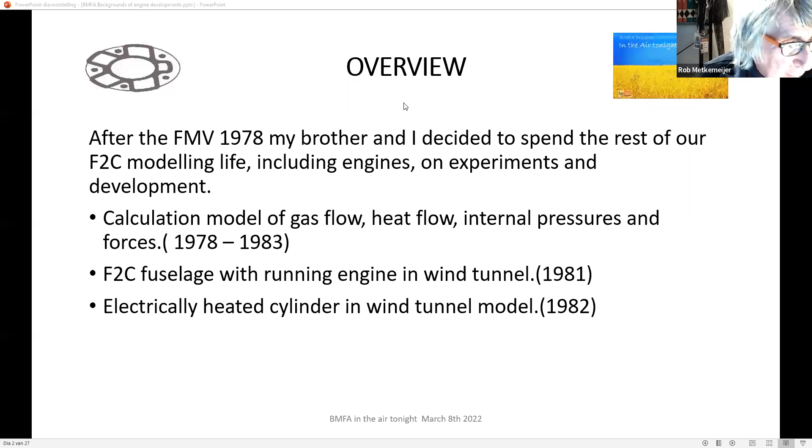The start was after the engine of 78, which was a steel engine with a hard chrome cylinder and a kind of special piston. I will not say too much about it because it's all been published in that Aero Modeler article.

After the World Championship, I remember I sat in a train somewhere 2 months after, and I thought we have to go to aluminium. There was a good reason for that, because not many people know, but about an hour after we won the World Championship final in Woodvale, Mauke Schwentner, who was second in that final, tested a new Nelson engine, which was an ABC. I am about 100% sure that if they had used that engine in the final, they would have won it, because it was much better than the steel one they used.

So I was convinced we had to go to ABC. People who read the FMV article in Aero Modeler will see we were already thinking about material combinations you could use for aluminium cylinders and pistons so that it could work. And funny enough, those ideas seem to be quite right. So, in that train...

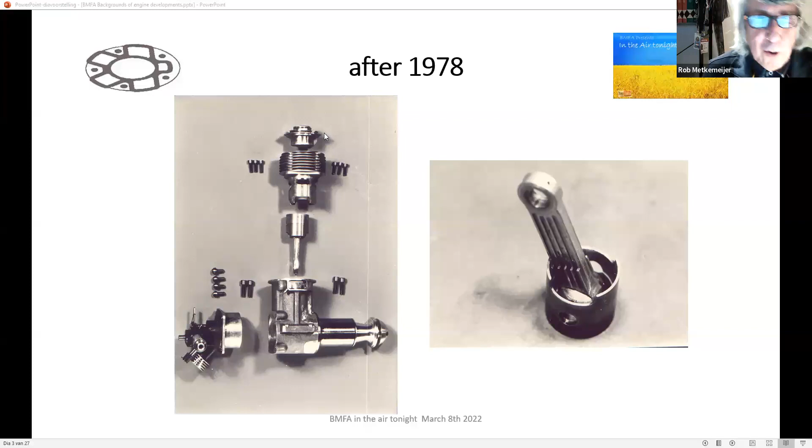Okay, I go on with the next one. I will try. I'm not going to explain you the full model, but I just want to show you how simple it actually is.

And then you have the cylinder where something extra happens. You get heat generation there. When the piston is going up, you get heat generation. And of course, then you have the exhaust.

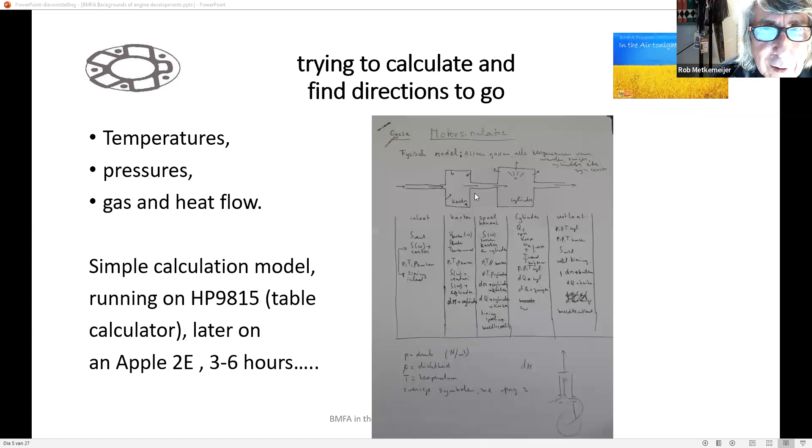That's very important. So what does such a model do? It simply changes by 1 or 2 degrees the position of the piston in the system. So you get all kinds of volume changes, and you get all kinds of gas flow.

In itself, these are quite complicated things, because all gas flow is kind of supercritical, or however you call it. It's kind of a shockwave transport of gas. It's not simply Bernoulli's law - it's different from that. It's kind of adiabatic expansion all the time, because the ratios of pressures are so high.

So these are the parameters which are important. And what you get with such a model is you just start it. You put in the initial pressures and temperatures and everything, and you let it run. You let it run a couple of revolutions, and hopefully it stabilizes. So it's stable when, at the end of the cycle, all the parameters are the same - the pressures and temperature are the same as at the beginning of the cycle.

So after a number of revolutions, you get a kind of steady state situation. I took as a criterion that it would be steady state if the air mass that goes through the venturi is equal to the air mass going through the transfer ports, which is equal to the air mass through the exhaust ports. And the funny thing was, it was kind of amazing because I don't really understand why, but it always gave...

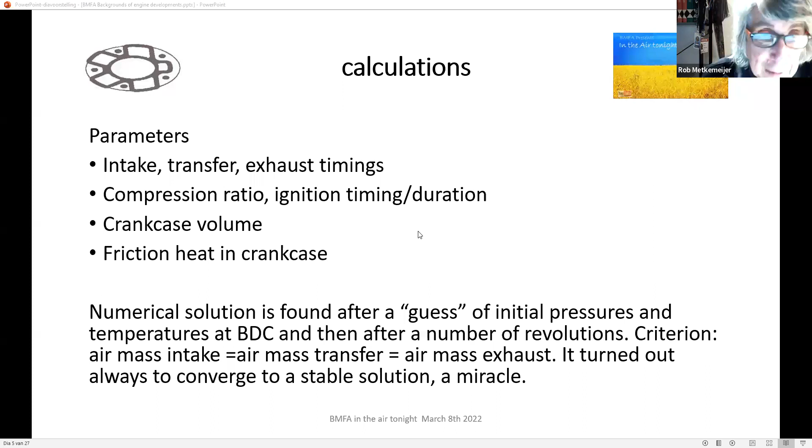Convergation, or converged - is that English? Maybe. It finds a solution. Do you mean confirmation? No, it means it comes to a stable solution. Convergence. Okay, convergence. Yeah, converge. Yeah, that's the right word then. It always converged, and I have quite some experience with trying to numerically find solutions for problems, and they don't always converge like that. But this was - it always converged, so I trusted that it gave about right results.

I'll give a few examples of results of this kind of calculation. At that time, we were really interested to see what kind of difference we needed between transfer timing and exhaust timing. Everyone can understand that when the exhaust opens, you need a certain amount of time to empty the cylinder so the pressure is low enough that the crankcase pressure can start filling the cylinder.

This is more tricky than you would think. I'll come to that later, but the original idea was that it makes sense that the pressure in the cylinder is at least equal to or lower than the pressure in the crankcase when you open your transfer ports. That means that the direction of the gas is into the cylinder and not back into the crankcase.

In human sports, it's the same. A good sportsman has a high oxygen consumption or use. So, that's recalculated to timing, to time for 10 laps in a team racing, because that's what everyone understands.

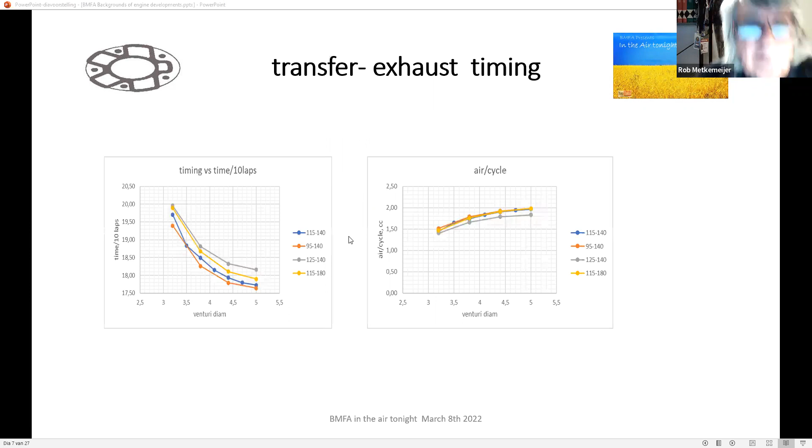The silencer, I come back later, maybe. One of the other, I go on, Barry, if you don't mind. I go in the story.

Yep, pick back up. I hope the people had the questions in front of them, because I did not repeat the questions, maybe I should have done that. Anyway. No, that's okay. Yeah, it's much easier to be in a small room and see the asking questions of everyone, I mean, the eyes open.

One of the things that came from this model was how the energy coming from the fuel and air is distributed over the engine and where it's going. You can calculate from the fuel: we have 7cc of some mixture with kerosene and ether. That should be 2250 joules, watts, for the kind of consumption we have, which is about a bit less than 3 horsepower of heat going into the engine.

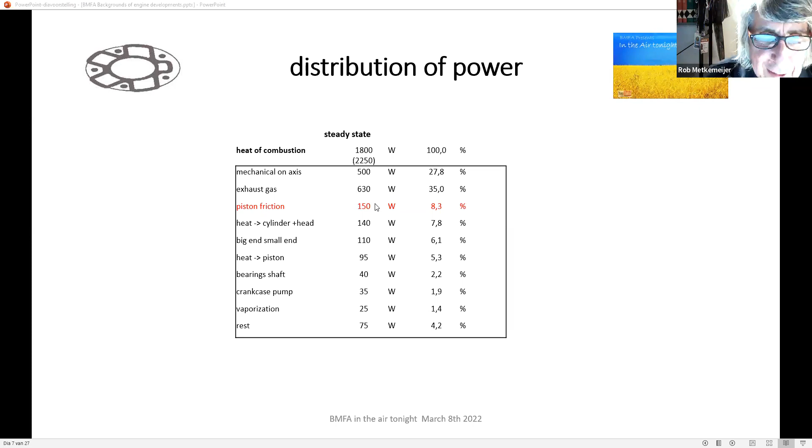I just saw questions about this. This is going to the load on all the bearings - mainly the big end and small end bearing and the bearings of the shaft.

What you see here is a calculation model that we use later when we're working on the pylon engine. It's coming from Frits Overmars, who is one of our Dutch guys who worked a lot in two-stroke motor racing. He was part of Aprilia.

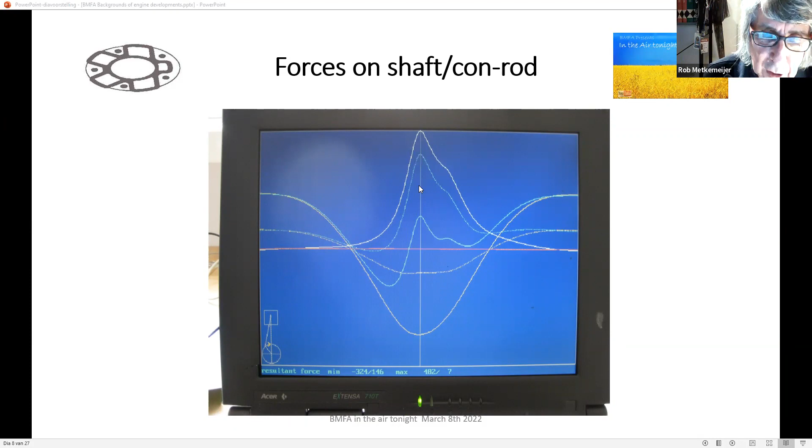and get the pressure on the whole bearing system down, which is maybe not according to your intuition. If you made a heavier piston and conrod, you'd have less force on the shaft and conrod, but more external vibration, which you don't want. Then you get foam in your tank and other problems. We don't want too much vibration in the models.

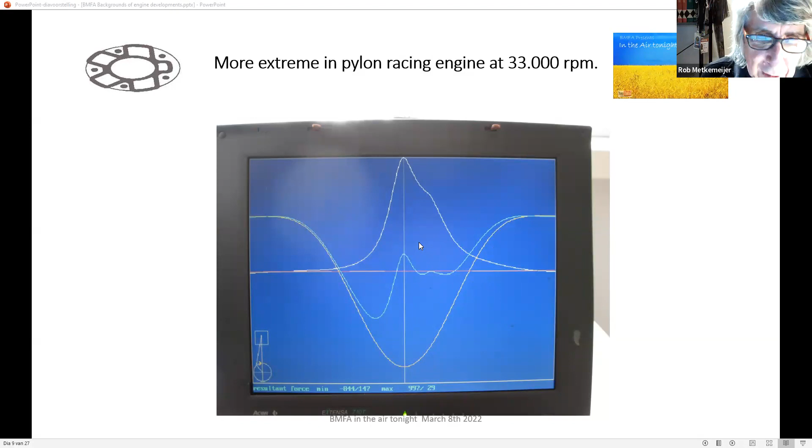Shall I go through some questions? Yes, Rob. I think if you could start from Neil Lickford's question at 7:35, he asked about team race pistons, ports, etc. Maybe this time read the questions out loud, it may make referencing a bit easier. Paul had a question about the promising modification.

Yeah, I'll come to that one. The silencer, I'll do something on at the end. I see the time is running, so... What about Andy Ellison's one? We'll come to that at the end.

What about Richard Palmer? Did you make the pistons tapered and oval like a race piston? Yes, we always do—it's already in the FMV article from '78. We made them tapered, but we don't make them oval. Maybe we should, but I'm only an amateur, and I don't have a machine that can make oval pistons. In team race, I'm not so sure, because you want the engine running when the cylinder is round—that's a bit of a problem. If you have an oval piston and the cylinder gets round on the ground, it may not start. So we never did this.

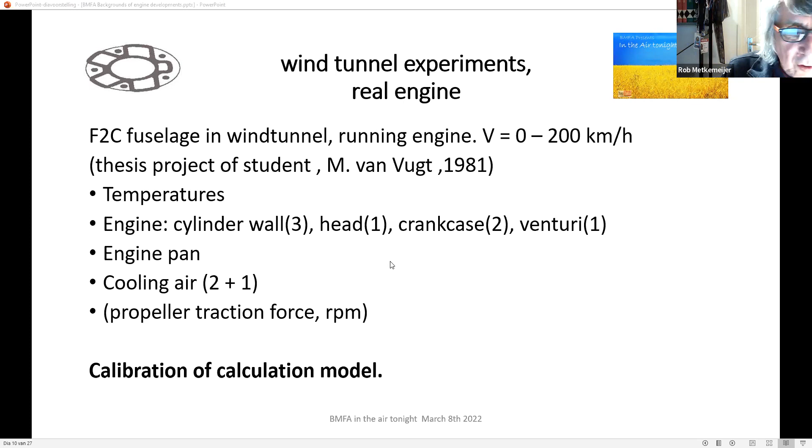But after about 30 seconds of running the engine, you see nothing anymore because the air goes round in a circle. So we had to do something special and let the air out of the wind tunnel, because the oxygen would run out very soon. That's not so easy, and of course it's not easy to start the engine, heat it up, and then do a run with the wind tunnel. It was hard work—I think we did 5 evenings of 3 or 4 hours to get 20 proper runs with a properly running engine.

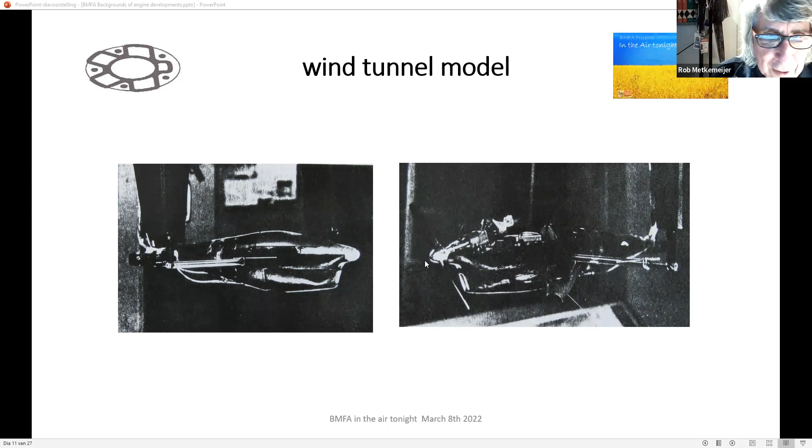This is about what is inside the model—more or less where the thermocouples are and what we did. You can see here that we had the possibility to put hot air into the engine or block it off, to have more or less the normal setup with warm air in the engine.

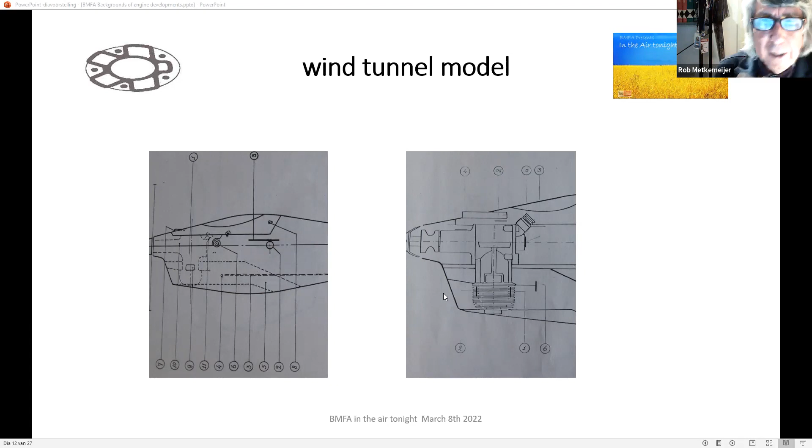And then the second year after, we had a similar student, Erik Janssen. Many of you know him. He was a F2B pilot, quite good, and he did his thesis on electric - on the same experiment, but then with an electric motor on the prop and electrically heated cylinder head.

So we could more accurately see what was really happening with the heat transfer in the cooling system of the engine. He studied a lot on how you should make cooling fins for optimum cooling power, and what was the relationship - how effective our way of cooling was in the model.

What was very important and very interesting for us was how oval our cylinders get when we run them in the model, because the air comes on the front of the engine. It goes very well through the sides of the engine, but it doesn't really hit the rear. So what temperature differences would you get?

When I tried to make pistons, I tried to get within 2 microns or so in roundness. And the whole unroundness of the system under normal cooling conditions is something like maybe 50 times that. So you get a very oval cylinder when running. As I said before, that was the reason we had a special piston which would adapt to that.

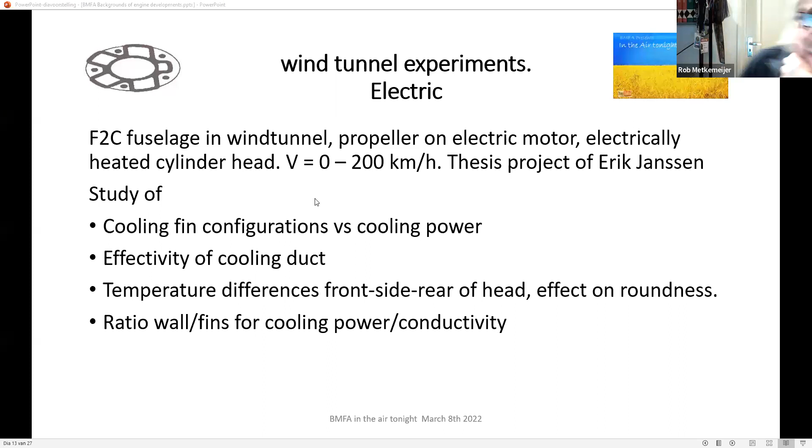Well, it would go too far to go through both reports - that's maybe 2 days - so I'll just go to the conclusions we took from it.

We found from running in the wind tunnel with the real engine that there was always a temperature increase during the run when we had a normal setting, something like a 35 lap setting on the prop we used. The engine behaved pretty normally, and we had something like the right airspeed in the wind tunnel, so I think what we were doing was quite right. Our conclusion was that it would be better to make more power and have 25 lappers instead of 35, which was normally done, and we did, to keep the cylinder temperature in a closer limit.

We measured the cylinder wall temperature in those tests. The cylinder wall temperature, where the engine was in a kind of normal running situation, was between 160 degrees centigrade and 230. Between those temperatures, there was no difference in how the engine ran - same RPM, same consumption, everything, between 160 and 230 degrees centigrade.

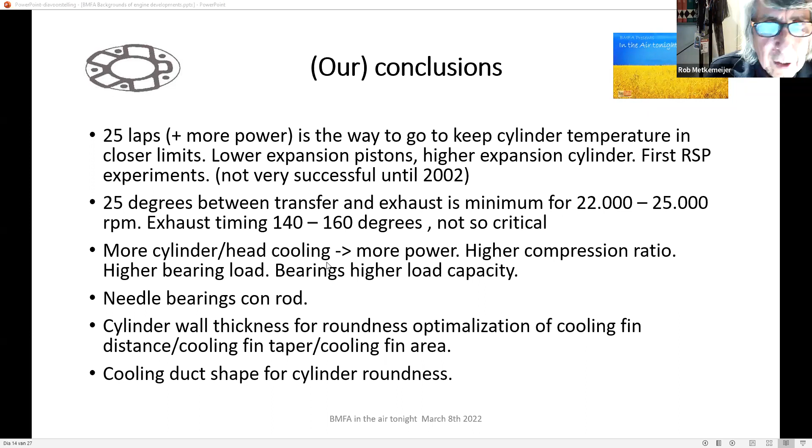This is very specific to a team race engine with integral cylinders. For something like a speed engine, it firstly has relatively a lot more internal cooling from the fuel - a lot more fuel - and usually a cylinder that hangs more or less loose in the crankcase, maybe not on top. So there the cylinder gets round easier, but the more air you put on a head, the more unroundness you get anyway. So for this team race setup, we tried, but we never really worked hard, to be honest, on this cooling duct shape. I don't know why now.

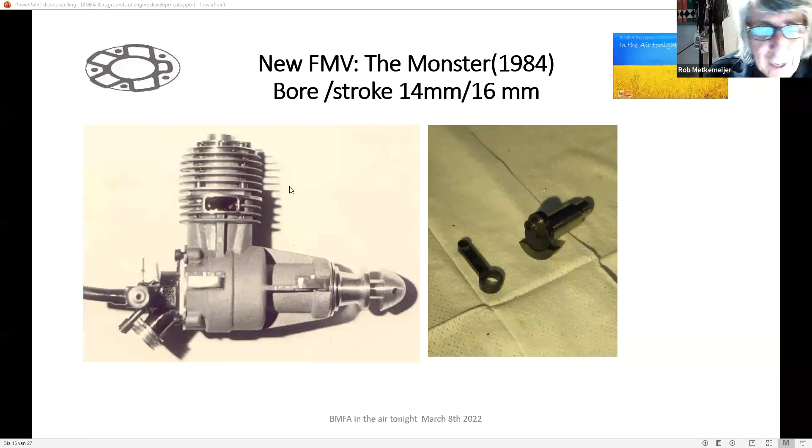As I just said, the cylinder and head were more or less following our findings from the work before. We also made the small version of the old FMV with the needle bearings and the steel conrod and another type of balance weight.

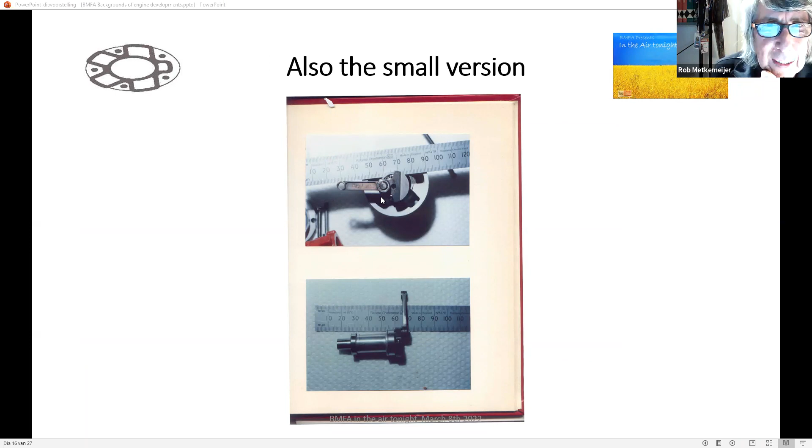And then after a few years of trying, we found that this big engine, which was strong enough, was extremely stable. You could set the compression anywhere and it would run, but it was too slow. So that's what happens. We also found, in experiments with this engine and others, that when we put more distance between transfer and exhaust, we were reducing burning efficiency, and we needed much higher compression and it would never run. More cooling is very hard on the engine, even on the very strong bottom end, even if we got power now and then.

And then the needle bearings - we really did the one-to-one comparison and never really found much better. Yeah, you want to see it's better because you worked hours and hours to make it. But to be honest, after a few years, you say, well, come on, forget it.

In the end, we got a higher exhaust - not extremely high, but higher - and a high expansion cylinder. So when you have a higher expanding cylinder, your piston may get hotter before it touches the cylinder wall. That worked. It was not so easy to start, but well, we were at least at the Euro Championships in '87 - we had one going really, really well.

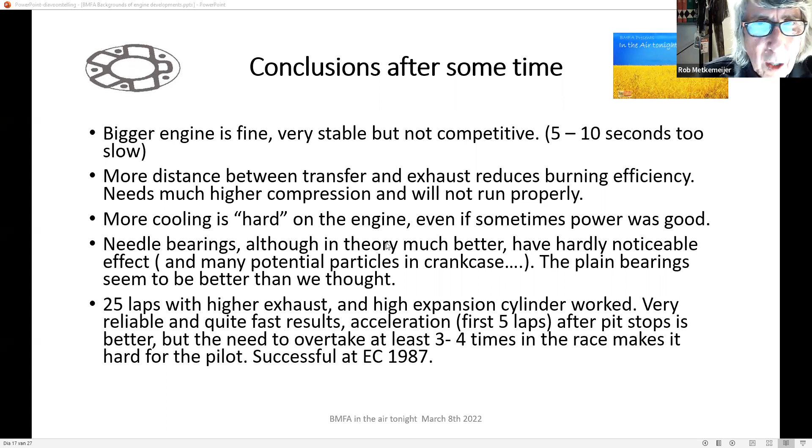Well, you see here a few cases we made on several setups with steel front ends. I still like steel front ends, to have bearings sitting in steel instead of expanding aluminium.

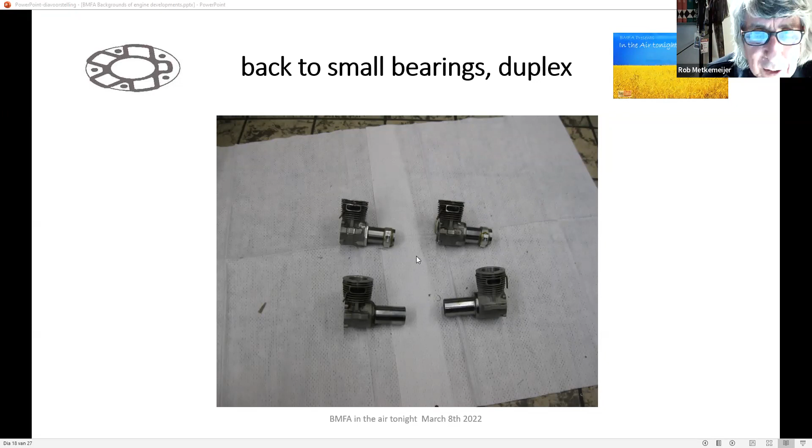These are a few examples of engines we made in, I think, 1990 or 1991. This one is a bit later. It's called MB in the meantime, not FMV anymore. It was working together with Peter Brendel, the Metkemeijer Brendel engine. The right one has the steel duplex, or the three bearings - two here, one here - with all bushes in between to set the place and position.

But this is a steel bush that goes straight into the crankcase, so the bearings sit in a steel bush. This was quite a successful engine. Bert and I had very good results between 92, I think, and 95 with this one. It was also a very stable engine.

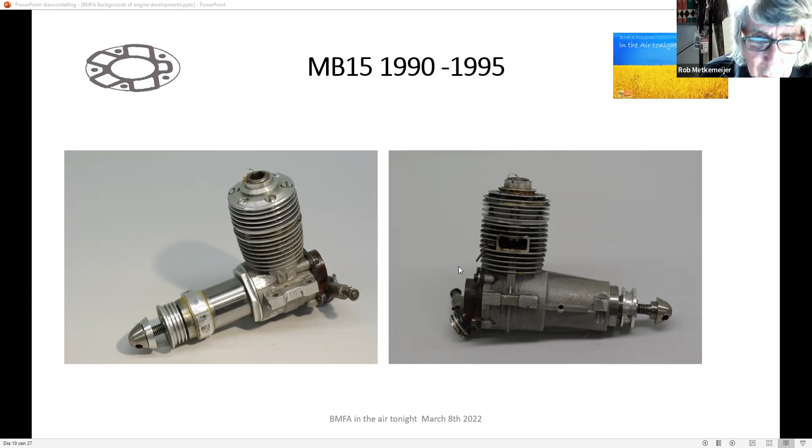Maybe you hear that I always talk about stability - that's the only thing we were looking for. An engine that runs for 100 laps and isn't too critical on setting. If you're in a competition, you don't have the time to set it all the time, so you still have something working.

Some people who fly pylon here may recognize the style of these engines, because it was at the same time as we were working on pylon engines. Here two things changed - this is an engine with a complete casting of the cylinder, so the ports are here. And it has a complete steel crankcase, also with the three bearing setup, duplex here and single here.

It was a kind of attempt to improve scavenging. Maybe we were influenced too much by people who just make power and don't have a self-ignition engine like we have, which is a not so easy to understand phenomenon. This is the same engine, but with an aluminium case and the steel bush here.

Maybe many of you ask how you make all these engines. As I said, I'm a true amateur - this is a mold for two types of cases, similar cases. I just make them on the hand milling machine and the lathe. These are, of course, made to create waxes, and the waxes go to the foundry and get cast. This was done for the engine with the cast cylinder.

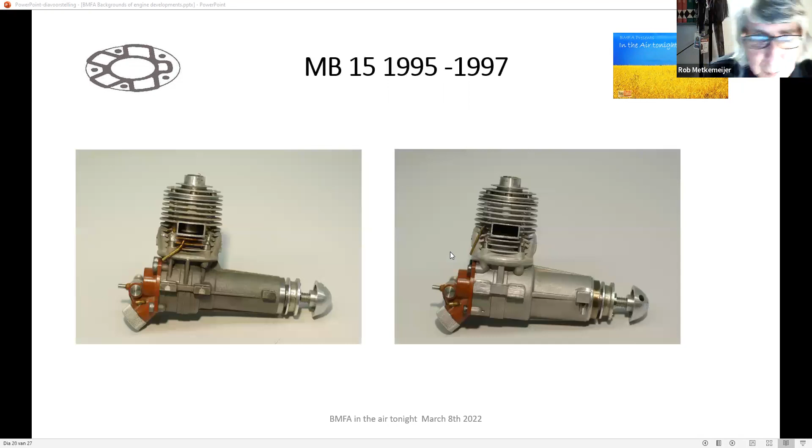I wanted to do more bottom end experiments to understand better. This is one without a duplex bearing - just normal bearings - and these are the molds to make the cylinder.

Here you can see something of the shape of the ports. We made very nice ports like they use in motor racing. The port splits on top - you cannot see it here, but it splits into two extra ports. In the end, it's a 5-port engine.

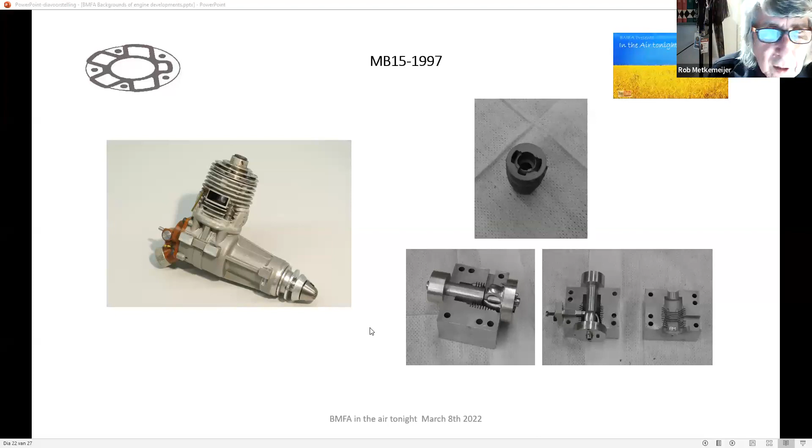From that period, the conclusion was that the duplex bearings worked fine. They aren't any better, but they're stable, they don't really wear, they don't break - or I mean, they don't get worse. They could run for a long, long time.

After a lot of work, we found that better displacement scavenging - just pushing the fresh gas in and the old gas out - does not work. It seems against a principle that in this kind of engine you need to recycle gas. It's the same idea as the too open exhaust port - when you throw away too much of your old gas and don't use a little bit of it together with your new gas...

Then you have an engine that won't burn well - you have to give it compression and compression, and it will hardly ignite. So these engines were simply not good. The bottom end experiments were useless because the cast cylinders were not any good - they did not work at all. So anyone who wants to try this, you have to do it better than I did anyway.

At the same time, we were making our props smaller and smaller. Our RPMs went up from 22,000 to 23,500, and to be very honest, that gave the main improvement over everything we did in those days. It's kind of a frustrating thing, but just making smaller props and setting your engine for it helped much more than anything we tried on the engine itself.

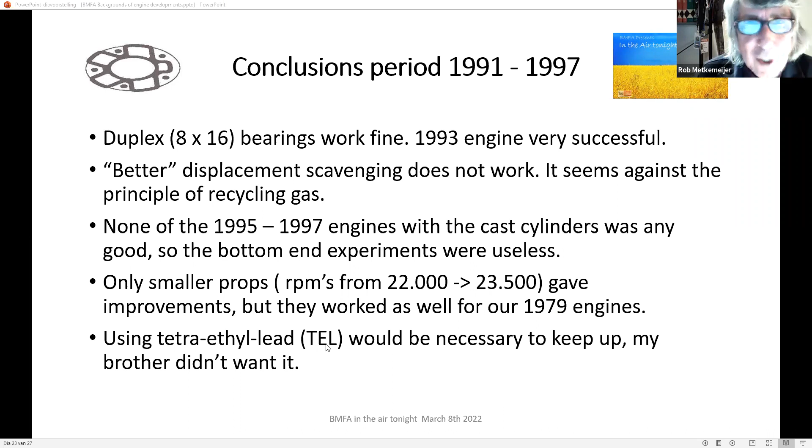One thing we never did was use tetraethyl lead fuel, which stabilizes a lot of things we've had problems with. Maybe we could not keep up with others at that time—they were using it, and maybe their engines were also better, I don't know. But maybe we should have used it. My brother, though, was a chemist, and he said we're not going to use lead, period.

You all know that we stopped team racing somewhere after 2000, more or less. Bert said, I'm too old, I'm not physically able to fly any good anymore. He used to be dominant in the circle, and he wasn't anymore. The others became stronger, so we stopped and went into pylon a little bit more.

Now around 2010, I started again with Ferenc Orfos. We did some new work. One of the things many of you know is we worked on a silencer, so I made an engine with a silencer. It was not as good as the open engine, but we were getting close. But this development has stopped now.

This is more or less what I've been doing in this time. I'm not casting the crankcases anymore, but milling them from bar stock, so we can use any good material for crankcases we want. We can use any expansion coefficient, we can go for higher thermal conductivity. I use a lot of RSP materials to make these cases, and at least we get very constant quality. So that's what I'm doing now.

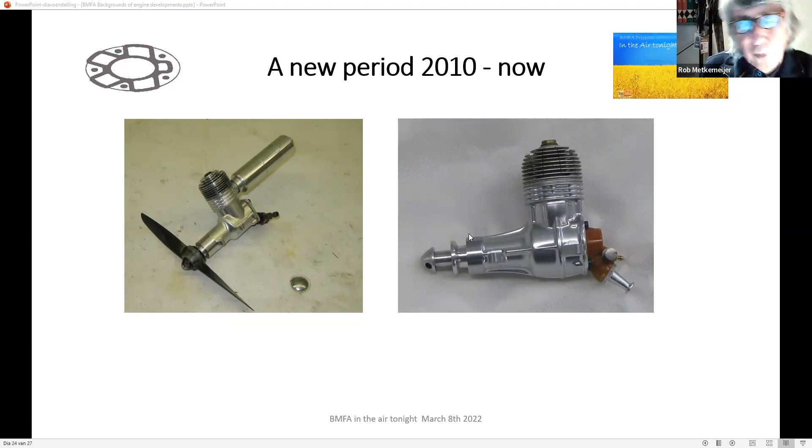This is the latest version of the same idea. For people who fly pylon, this is the pylon engine that will be made in the same way. At the moment, of course, we all know Ukraine is in big trouble, so my prototype cylinders and crankshafts are probably delayed.

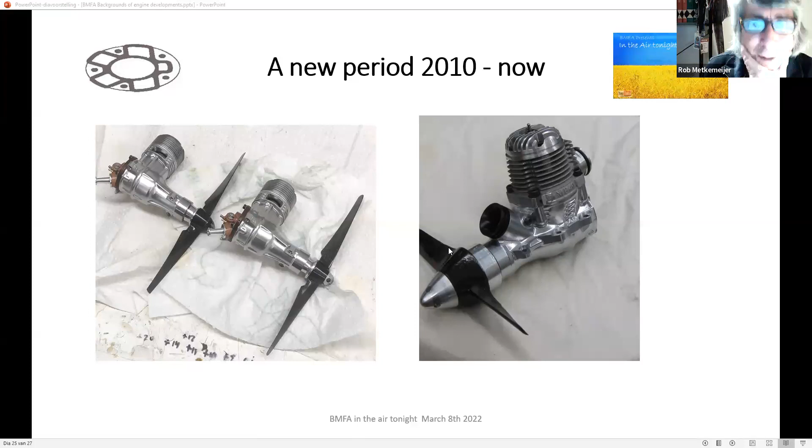There's another experiment I did—I think I said 'future' here. I still think, and maybe it will be my last trick.

Someone asked, will there be a big next step in engines? I remember the big step in 1966 from Bill Wisniewski, who came up with a tuned pipe on his speed engine. The world championship in '64 was won with 230 kilometers an hour, and he won in Swinderby with 260 kilometers an hour. Theobald was 240, still behind him, using the same kind of setup. But the first open engine was doing 230 and 232, I think. So within two months, the whole world was flying tuned pipes on speed engines. I've never seen an open speed engine after that, well maybe in 5 or 10 cc, I don't know, but not in FAI.

So last year and the year before, during the Corona years, I had a little bit of time to make a few engines with not a real rear exhaust, but a 30-degree, a little bit side exhaust. Under the current rules, that's allowed. I even made a test bench—I'm not a test bench man, but I made one to see what it would do for a team race engine.

Given the fact that we are on 3mm venturis now, which reduces the amount of air we can get in—anyone knows that a tuned pipe gets more air through the engine, that's what a tuned pipe does. So a way to get more air through the engine is to make a tuned pipe. Now you see here a pipe you can hardly recognize as a tuned pipe, but it is, and it works like that.

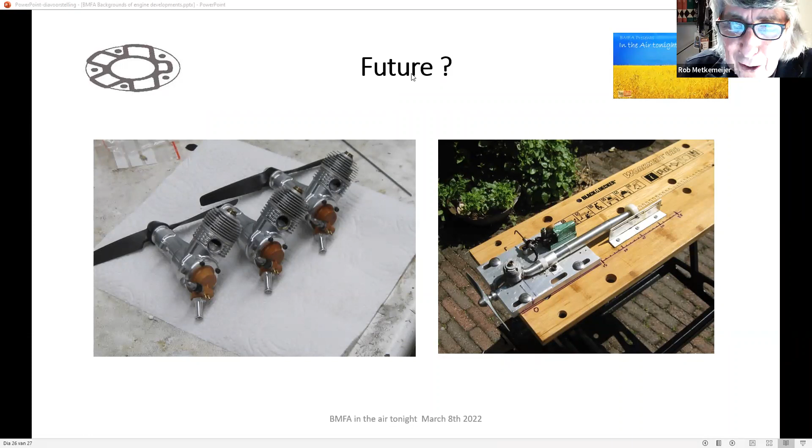I think Richard Palmer's question here, I'll read it out: Did you try to reduce the crankcase volume to increase gas speed?

So this is really back to that sort of very old two-stroke tuning, stuffing the crankcase down. In an open engine, like a team race engine, not a tuned pipe engine, but an engine that needs the crankcase as a pump for the air, reduced crankcase volume is a way to get more power for sure.

And our calculation model was very clear. Of course, you have a practical problem. You cannot infinitely reduce your crankcase volume, but in the current engines I make, and Lerner makes, and I think even Chaika makes, they try to fill the crankcase as much as they can. And this is especially because of the 3mm Venturi. When you have a small Venturi, you need a good pump, a stronger pump.

So yeah, we tried. I have a few, I didn't show all my engines, but in the last 5-6 years, since I make my crankcases by milling from bar stock, I can make anything inside. And I have tried to reduce it. To be honest, I cannot say it's just a simple step up, because you cannot reduce a crankcase volume easily. I think the minimum volume for a properly designed crankcase is maybe 5 cc's or 4.8. It's not easy to get it down to 4.5. So the relative reduction of crankcase volume is very hard to get.